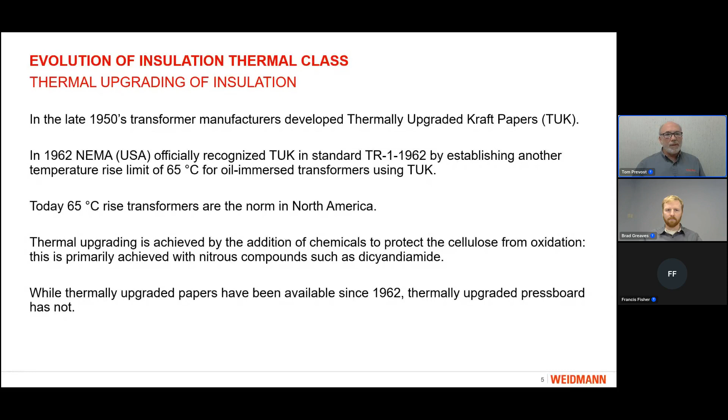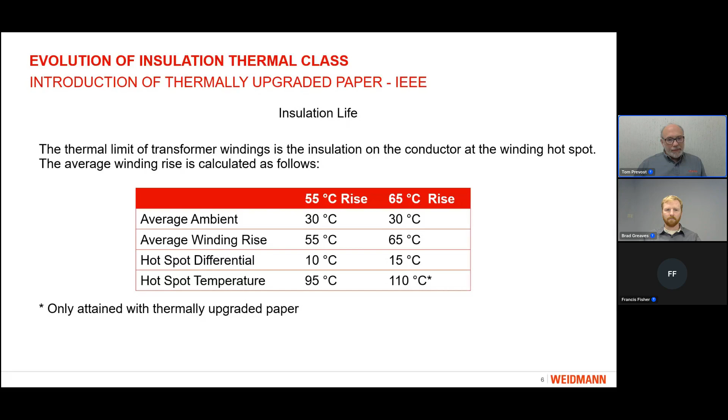So with the ability to thermally upgrade paper, the transformer manufacturers were able to go from a 55 degrees C rise system to a 65 degrees C rise system. And the primary point is to look at what the hotspot temperature is. So with a 65 degrees C rise system, the temperature at the hottest spot in the winding is able to be 110 degrees C for normal life. Okay, next slide, please.

So one of the things that Brad's going to describe, and it's kind of a question even within the discussion, is when we're talking about thermal classes or thermal indexes. I took this from the IEEE test standard, which we'll talk about extensively later on. But this is a standard test procedure for thermal evaluation of insulation systems for liquid immersed transformers.

And what the test program itself provides is the thermal index. So the thermal index is the maximum hottest spot temperature for which the insulation system is expected to provide normal life. If you remember the previous slide, the thermal index for a 65 degrees C rise transformer, for example, is 110 degrees. So when we're looking at an aging test, the maximum hotspot temperature is determined by using the aging test and then rounding down to the nearest value given in this table, which I excerpted from the standard.

So if you look at thermal class here in Table 2, a thermal class of 120 equals a thermal index of 110. So in the test, any result between 110 and 120 would then be rounded down to the next value. So if, for example, the test came out with a thermal index of 115, it would be rounded down to 110, and then the thermal class is 10 degrees C higher than the thermal index.

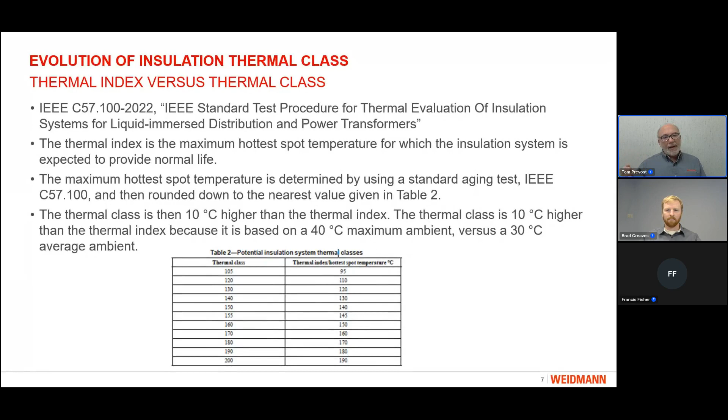I know it's a little bit confusing. The key point is that thermal class is 10 degrees higher than the thermal index. So we test for the thermal index, add 10 degrees, and that gives us the thermal class. And the basis of the thermal class is that the thermal class is based on a 40-degree maximum ambient, where the thermal index is based on a 30-degree average ambient. Next slide, please.

So when we look at our standards, the first thing I look at is the IEEE standard. The general standard for transformers is C57.12.00. It was last revised in 2021. And in this one section, which is the basis for the temperature limits, the particular thing I want to look at is what I highlighted here: the requirement for the temperature limit applies to the insulation components that determine the minimum life expectancy.

And this has been defined in the standards as the winding insulation or the conductor insulation, or if it's a layer type winding, the layer to layer insulation or the lead insulation, anything that's in contact with the conductors. So what has been interpreted by this standard is that the pressboard, which is not adjacent to and contacting the conductor itself, does not need to be thermally upgraded. Next slide, please.

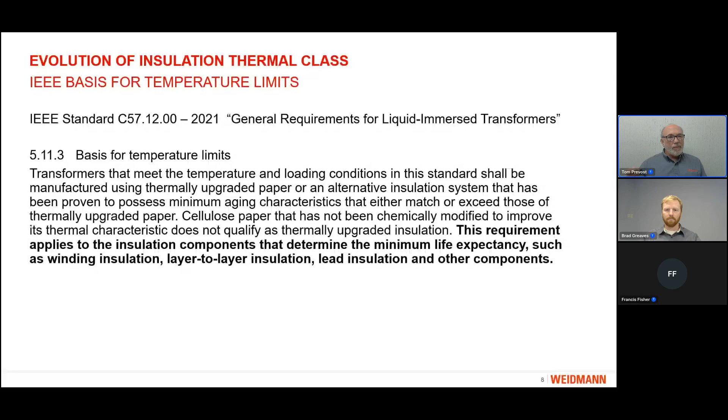If we switch over to the IEC standards, we can see a different concept of the value of thermal upgrading. The last time the main standard that defines a thermal class for transformers was revised was in 2011. In fact, this is being revised as we speak, but the current standard states that there's only one value for temperature rise limits. And in fact, it says, if not otherwise agreed between manufacturer and purchaser, the temperature rise limits given in Table 1 are valid for both kraft and upgraded paper.

And that's also discussed in 60076-7, which is known as the loading guide for overtemperature. So in this case, the hotspot winding temperature rise limit is 78 degrees because, unlike the IEEE world, they assume a 20 degrees average ambient temperature. So in IEC, the limitation for the hotspot is 98 degrees. And in IEEE, the limit using thermally upgraded kraft paper is 110 degrees, but the pressboard can be a lower temperature class. Next slide, please.

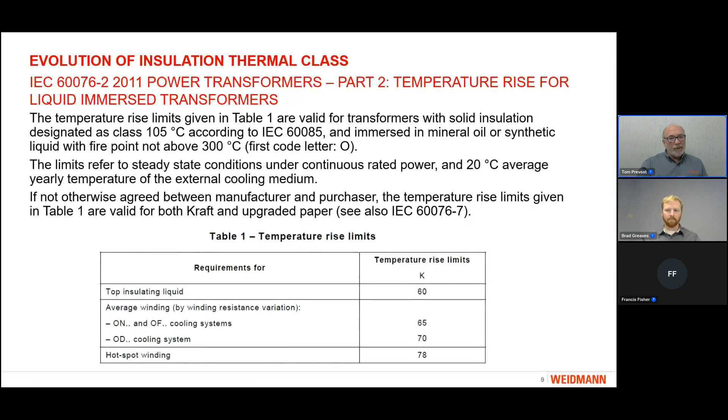I mentioned that the IEC transformer standard is being revised. That draft was circulated the first time about 6 months ago. In fact, there were more than 1,000 comments on it, so it will take some time for the comments to be addressed. In this new revision, we can see that in Table 2, there are now 2 thermal classes: the traditional 98 degrees hotspot, and then if you use thermally upgraded paper, a new thermal class of 120 with a hotspot temperature of 110.

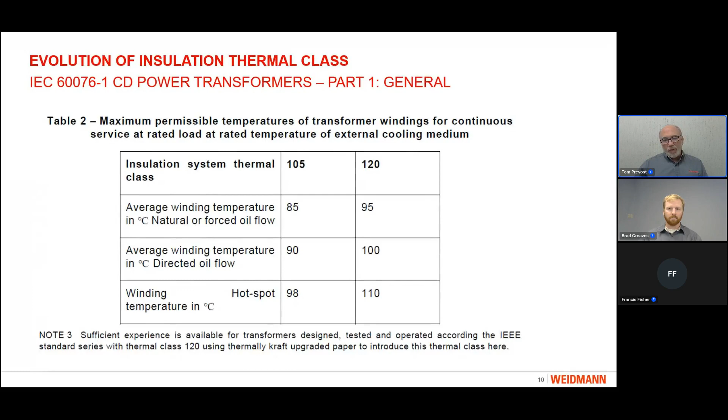And if we look at Note 3, it says that sufficient experience is available for transformers designed, tested, and operated according to the IEEE standard series with thermal class 120 using thermally upgraded kraft paper to introduce this new thermal class. So 60 years after the IEEE adopted 110 degree hotspot temperature using thermally upgraded paper, the IEC is now moving in that direction. Next slide, please.

So to summarize, to look at the evolution, we went from non-thermally upgraded to thermally upgraded kraft paper. That allowed us to go to a 65 degree C rise system. In the current IEEE standard, a 65 degree rise system is defined where thermally upgraded kraft paper is required, but the board is not required to be thermally upgraded.

The upcoming IEC 60076 Part 1 is introducing this same concept of a 65 degree C rise system using thermally upgraded paper. So if you look at the problem statement, and I'll let Brad take it from here, industry practice and international standards recognize the utilization of non-thermally upgraded pressboard with thermally upgraded paper as a 120 class system for mineral oil immersed transformers.

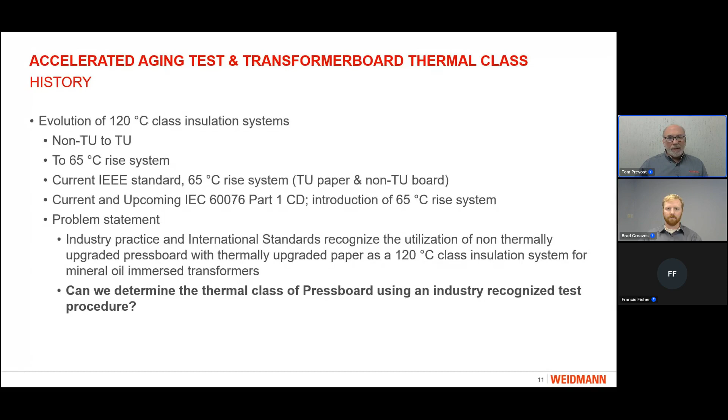And the question is, can we determine the thermal class of pressboard using an industry recognized test procedure? So how can we validate what the industry has recognized and is now being adopted into the standards? So with that, I'll let Brad answer this question. So Brad, take it from here.

Great, thank you, Tom, for that overview and history of thermal upgrading. So as Tom stated, now I'm going to look more into details of how we went about answering that. So first, when we look to determine how we can answer this question, we look to the IEEE C57.100 test standard. This test standard provides guidance for such an evaluation with the so-called sealed tube accelerated aging test. And within this test, we first look at the industry proven system.

Looking at table B1 within this test standard, we actually have two material ratios defined. The first one being the power transformer materials ratio. And we can see in this table, this materials ratio has conductor insulation, which in our case is Weidmann thermally upgraded kraft paper. And we have high density pressboard, which again is Weidmann high density pre-compressed T4.

We then look at the distribution materials ratio, where we see slightly different materials as well as different ratios. So in this case, we have what's considered layer insulation, slightly thicker, same density, but still thermally upgraded kraft paper. And then we have low density pressboard, in our case, Weidmann HiVal, slightly lower density than our T4.

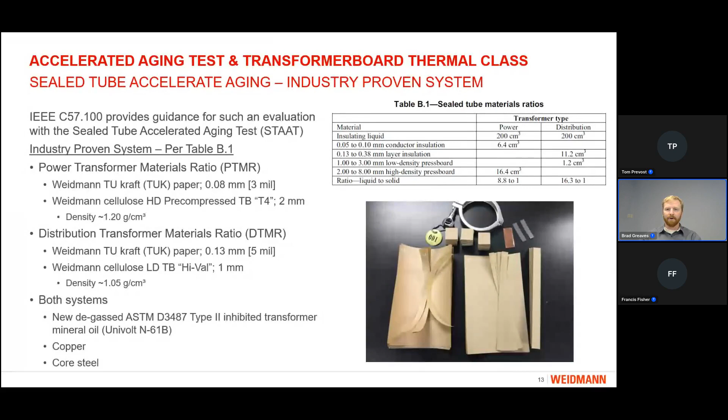Looking back at the transformer standards that Tom mentioned previously, the C57.12.00 brings this life equation or life expectancy curve shown on the right. The minimum life expectancy is defined in the standard as 20.5 years or 180,000 hours. And this again is the 65-degree average winding rise, 80-degree hot spot.

So when we look at the minimum life expectancy curve and try to relate it to an accelerated aging test, we look at a maximum of 40 degrees C extrapolation from the thermal index, which again is 110, to the minimum aging temperature. The standard requires that aging temperatures be 15 degrees apart. So using equation 1 from this standard, we can define our three aging temperatures at 150, 165, and 180, and a corresponding aging period to achieve the minimum life expectancy.

So at 150 degrees, we have an aging period of 4,434 hours. At 165, it's 1,316, and 180 being 424 hours. And again, these are all points on this minimum life expectancy curve, which would be equivalent to the 110 degree C thermal index and the 180,000 hours.

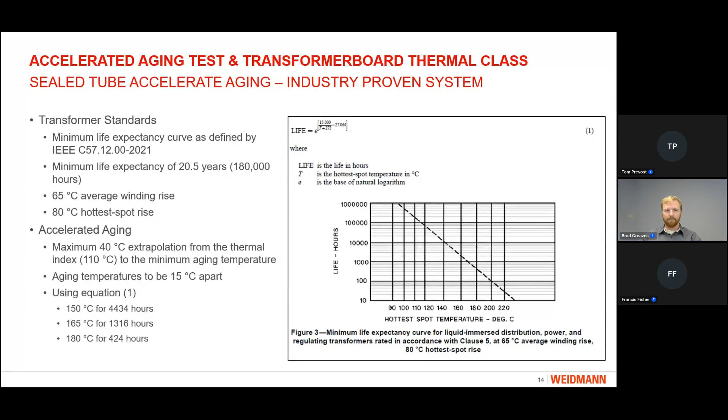So looking at some details of how this testing is done, we use a vessel, a stainless steel tube, approximately 100 millimeters in diameter, 210 millimeters tall. It's approximately 2-liter volume, slightly larger. It has a clamp-on lid shown here with a Viton gasket to ensure that we have a good seal on that lid. And it is fitted with a 10 psi pressure relief device.

That pressure relief device is used first to keep a consistent pressure within that aging vessel, but also to ensure that we're not building up significant pressure where we have a potential safety concern within the test lab. With the material preparation, all solid materials, both pressboard and paper, are dried to a moisture content of less than 0.5%. And the liquid is dried using heat and vacuum to a moisture content of less than 4 parts per million.

During the filling process of these vessels, after combining the solid and liquid components, the headspace is then flushed with dry nitrogen prior to being fitted with the cover and sealed. After the aging periods for each of these vessels, the solid material is removed, and then the machine direction tensile strength is tested on both the paper and the pressboard, as well as the degree of polymerization on both materials.

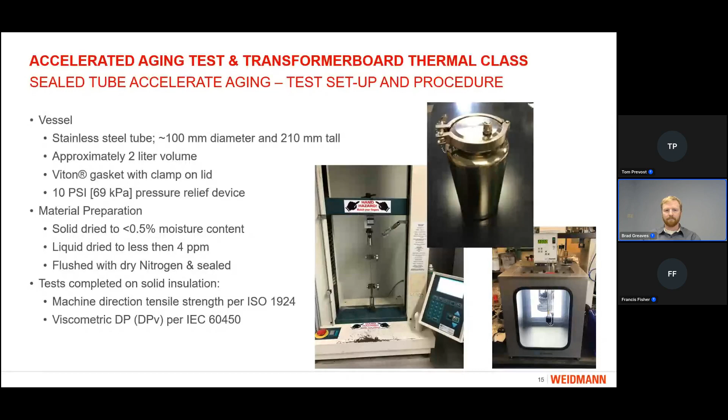So one of the first things to do when completing this standard or this test is to determine the end-of-life criteria of the system. So we do that by using the industry-proven system at the 3 time temperature combinations that I discussed 2 slides ago, along that minimum life expectancy curve. So the industry-proven system is aged, and then the tensile strength is tested following those aging periods, and that retained tensile strength is used as the end-of-life criteria for the candidate system. You can use other criteria such as DP or tear strength, etc., but typically it is tensile strength retention.

When we look at our candidate system, that is prepared and aged in the same manner as the IPS until that end-of-life criteria is achieved. So again, we have 3 aging temperatures, 15 degrees C apart, the maximum 40 degrees extrapolation from the expected thermal index, and the minimum of 3 aging times per temperature. And what you're trying to do by aging the candidate system at multiple periods is to build these aging curves shown in this graph on the right. So under the same aging temperature, as we have multiple aging vessels, we see the degradation in, in this case, tensile strength retention of our candidate system.

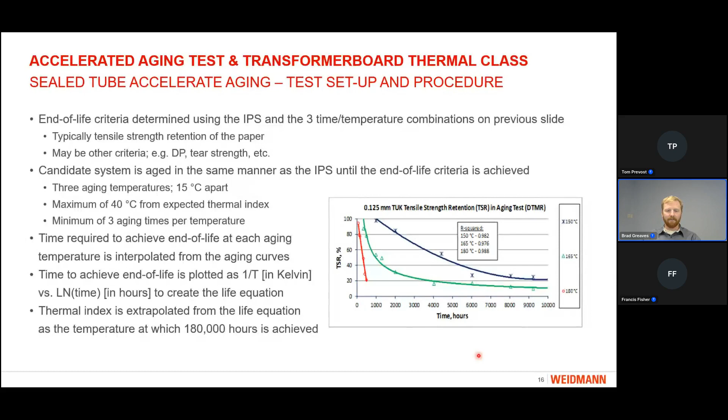So specifically for the testing that we had done, we had a test program with our standard material ratios, both power transformer with T4 and TUK, and our distribution transformer ratio with Hi-Val and TUK. We used the same 3 temperatures as the IPS, the 150, 165, and 180 degrees C, and we had multiple aging periods per temperature. We had slightly different for the ratios. For the power ratio, we actually had 8 in most cases, and for the distribution, we had 6. And you can see in the tables below the actual time periods that were aged for these systems.

At the highest temperature, a minimum of 1 week, but at the lowest temperature, you can see we went out to a maximum period of 62 weeks. Just kind of showing, although these are accelerated tests, they still do take a significant amount of time. And we defined in this test series our candidate system to be actually the transformer board within those material ratios.

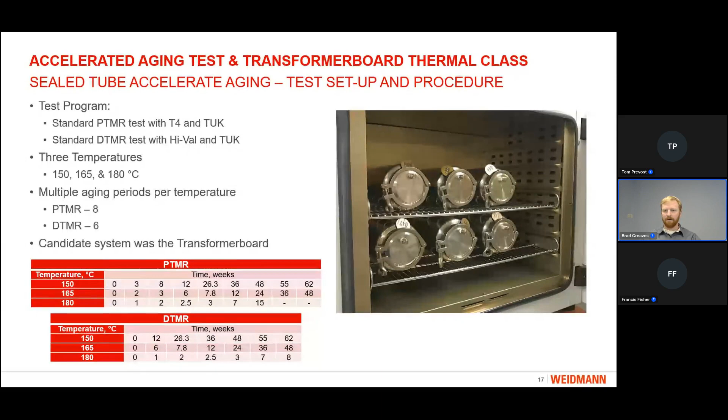So now we'll look at a few observations that we made throughout these testing series. So the first one is the end-of-life criteria. As I mentioned before, the end-of-life criteria is determined by the testing of the solid insulation, specifically the paper, following those 3 time temperature points. For the power materials ratio, we see a retained tensile strength of the paper of 14.6% for those three time temperature combinations, and a degree of polymerization of 146. For the distribution materials ratio, we see quite a difference. We actually see retained tensile strength of 44.2% and a DP of 256.

So after reviewing that and discussions, we believe the reason for that is there is relatively more thermally upgraded paper in the distribution ratio, which is then slowing down the aging of all the solid insulation materials, including the transformer board. Additionally, there is relatively more solid insulation compared to the liquid in the power materials ratio, and this is resulting in more aging byproducts being generated and then further accelerating the aging. So between those two things, we believe that is why we see faster aging in the power materials ratio compared to distribution, resulting in the lower end-of-life criteria with both tensile strength and DP for the power ratio.

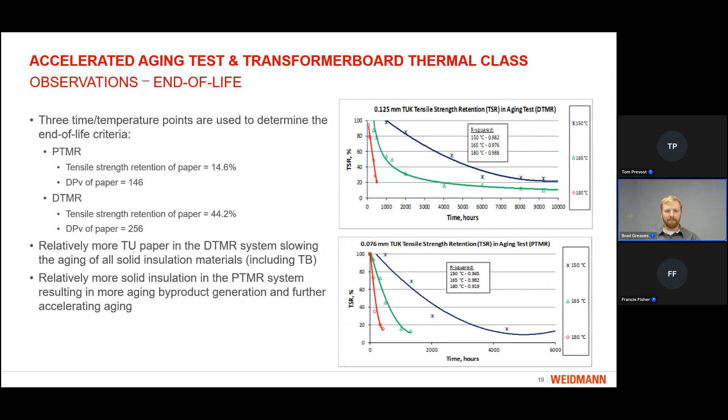Now, in order to try to confirm these hypotheses, another small aging test was completed. So for this test, we actually looked at the same material ratios, the power and distribution. However, we substituted thermally upgraded paper for non-thermally upgraded paper, really trying to see what the impact of the thermal upgrading agent had on the entire system. So we had power with the same T4, TU, and non-TU paper, and distribution in the same way.

For this smaller test series, we did a reduced aging period of the 180 and the 165 for various temperatures, but really trying to build the same aging curves that we saw previously. So what we learned from this is we can look at the aging curves here.

And if we look specifically at the Hi-Val and paper curves, so Hi-Val and TU paper is this blue curve here, and Hi-Val and the non-TU paper being this orange curve here, we see a significant difference in the aging rates and aging curves of those two ratios, with the only difference being the presence of the thermal upgrading agent.

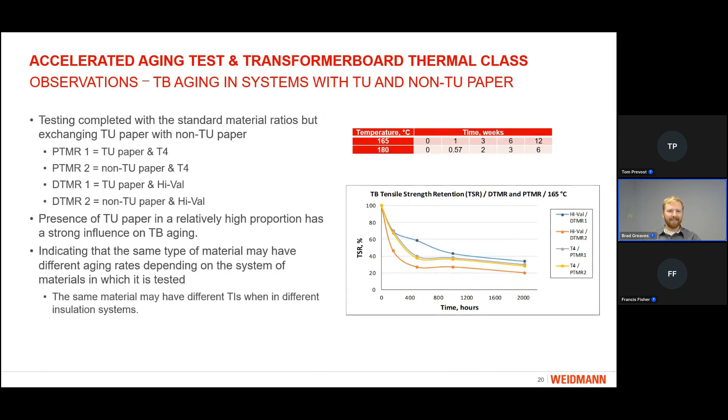We can see that from the aging curves here. The same press board has different aging rates depending on the combination of materials it's aged with. And ultimately, this could lead to the same material having different thermal index when in different insulation systems. So now we'll look at a little bit of the results and the conclusions of the full aging test that we did.

So the first thing to consider is the analysis method that was used in this project. We actually looked at 3 different methods of analysis. Method 1 is following the standard 2011 version of C57-100. As I described before, TUK is considered the industry-proven system. We looked at both tensile strength retention and DP at end of life. I previously mentioned what those end of life criteria were. And in this case, we define the transformer board, both high and low density, as our candidate system.

The second method that we used was looking back at a previous version of C57-100, the 1999 version, where we looked at the tensile strength retention of the individual materials. So here we had all materials, both the TUK and the transformer board, being evaluated with an end-of-life criteria of 50% tensile retention at 65,000 hours. So different from the first method, where we were comparing the transformer board to the industry-proven system at 180,000 hours, in this case we looked at all materials independent of each other at 65,000 hours.

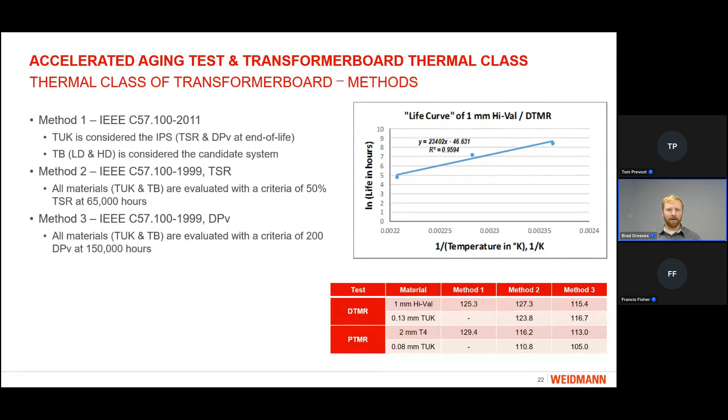And then method 3, similar to method 2, looking back at the 99 version, but in this case, looking at degree of polymerization. And again, all materials are evaluated independently of one another, but with a criteria of a DP of 200 at 150,000 hours. So using those three methods of analysis, we end up with a variety of results summarized in this table here.

So the first thing is looking at method 1. We're using, again, the 2011 version of this standard. We have the thermal index of the transformer board, both high and low density, being 120 degrees C. So as Tom described previously, using this method, we look at the thermal index being the point at which the minimum life expectancy curve crosses the 180,000 hours. For these materials, for the distribution ratio, that was calculated at 125, and for the power ratio, that was 129.

However, as Tom described, this is then rounded down to the nearest 10 degrees based on the table that he showed. So defining the thermal index of both of these materials at 120 degrees C.

Using method 2, where we looked at each material independent of one another, we're comparing the thermal index of the transformer board to the paper. And in both cases, both distribution and power, we observed that the thermal index of the transformer board is slightly higher than the thermal index of the paper. The absolute thermal index of all of these materials for the distribution ratio was, again, 120 degrees C, rounding down to the nearest 10. And for the power ratio, rounding down, was 110 degrees C.

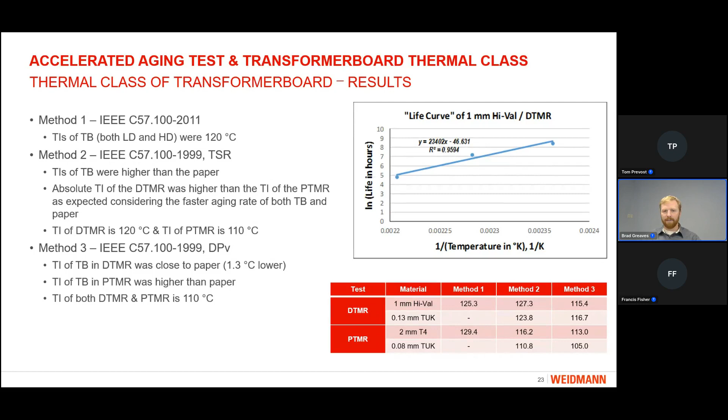So finally, I want to come back around to Tom's problem statement: can we determine the thermal class of transformer board using an industry recognized test procedure? And the answer to that is yes. So for the first time in the industry, the thermal class of transformer board, both high and low density, was confirmed to be 120 degrees C through sealed tube accelerated aging testing. Following an industry recognized procedure, IEEE C57.100, we established a temperature index of at least 110 degrees C, in many cases being 120.

So with a thermal index of 110, as Tom described, adding 10 degrees to that establishes the thermal class of 120. However, in defining the thermal class of the transformer board specifically, we actually learned that thermal class cannot be determined on an individual material. The thermal class is really on the entire insulation system. In the instance of the industry proven system, that is thermally upgraded kraft paper, the non-thermally upgraded transformer board, and mineral oil. Based on what we learned on the presence of the thermally upgraded kraft paper and its impact on the aging characteristics of the non-thermally upgraded board, these systems must be tested and defined as the entire system and not the individual components.

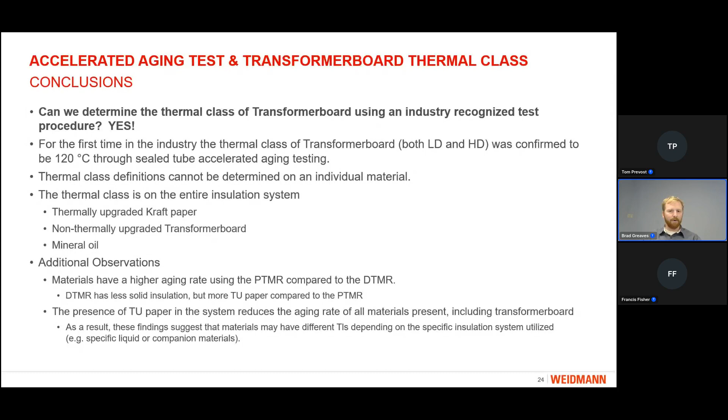A few additional observations here: the materials have a higher aging rate using the power ratio compared to the distribution. The reason for that, we believe, is the distribution has less solid insulation but more thermally upgraded paper compared to the power ratio. And finally, the presence of the thermally upgraded paper in the insulation system reduces the aging rate of all the materials present, including the transformer board. And just to reiterate, these findings suggest that materials may have different thermal index values depending on the specific insulation system utilized, whether it's a specific liquid or the companion materials. The entire system and all the components shall be tested, not individual components.